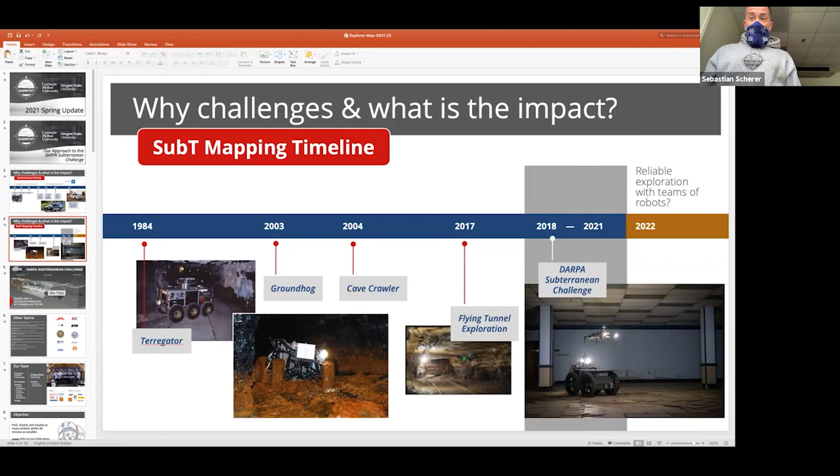Relative to that previous timeline, this shows where we are in the technological development when it comes to underground robots. Starting in the 80s, technology was being developed. We're now currently in a DARPA challenge, and the real question is where do we go from here? Where are the companies, what is going to be industrialized, and really where's the true impact going to be? All right, if we can go to the next slide, please.

All right, so introducing the actual Subterranean Challenge. This started back 3 years ago, and it was 3 circuit events, focusing on 3 different environments. So tunnels was the original competition circuit event.

Then there was an urban event, which happened last year. And then there was supposed to be a third circuit event, which was going to be in caves. That third circuit event was actually canceled due to COVID, what we're dealing with right now.

But as we're moving towards September of this year, the final competition is taking all 3 of these environments and putting them together. The overall goal is to go out and locate artifacts. The robots are acting in a very autonomous way, searching these different terrains and types of environments, trying to locate artifacts. So they have to build a map, there's no a priori knowledge, so they're going out blind and searching these environments.

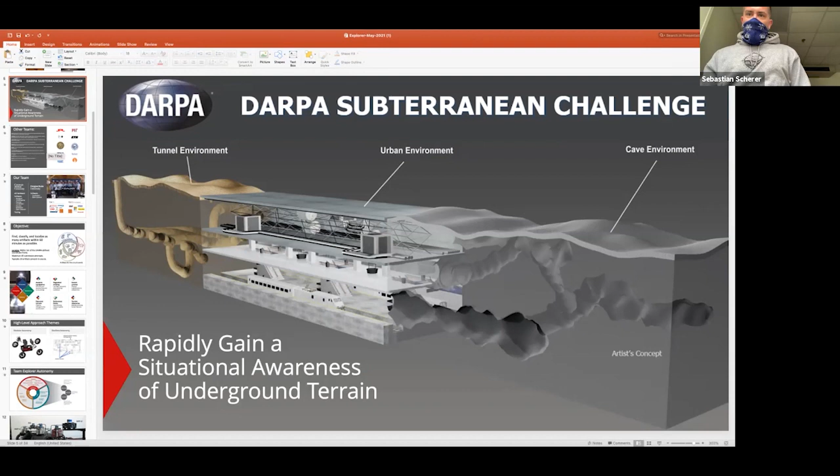That's sort of the overall goal, and in the next slide we're going to introduce what the artifacts look like. But the overall goal is to be able to go and search these environments as fast as you can and locate artifacts with as much accuracy as you can. Cool, thank you Geoff, I'm going to turn things over to you.

Great, thanks Matt. So I'm Geoff Hollinger from Oregon State, I lead the Oregon State part of the team. I wanted to talk just a bit about some of the other teams that are competing in this challenge to give you a sense of how competitive the field is.

So you can see that many of the major players in robotics, in addition to CMU and Oregon State, have teams here. So JPL, MIT, ETH, University of Nevada Reno, Berkeley, Georgia Tech also had a team, UPenn had a team in the first circuit. Here's a list of the various different teams, and they're all taking various different approaches.

Moving on to the next slide, talking about our team, we have two universities. Carnegie Mellon University is the team lead, and Oregon State University is supporting the team as well. CMU is focusing on the hardware, and then portions of the software support, including perception, simultaneous localization and mapping, planning, coordination, the executive level, the base station, and object detection.

Currently, Oregon State University is focusing on coordination and object detection, though in the early circuits, we were also participating in the base station design as well. Oregon State University also helps with testing, and this has been more difficult with COVID because of the remote situation, but previously we had visited CMU a number of times and participated in the testing and helped to ensure that the system was robust and fieldable.

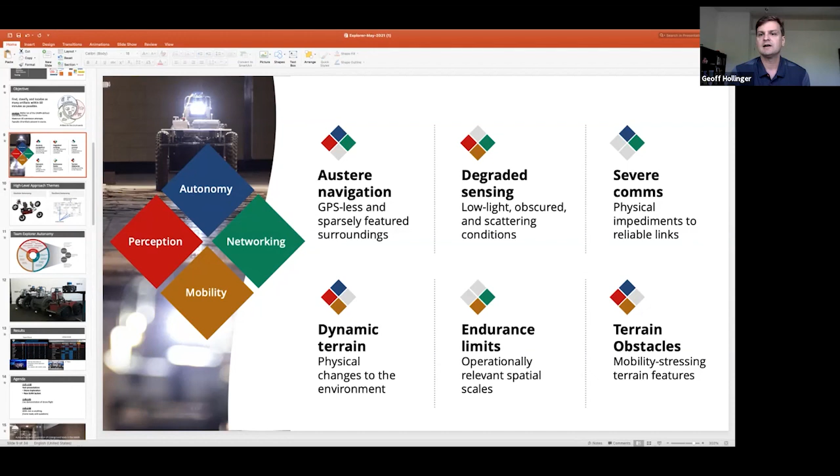This requires us to deal with perception, autonomy, networking, and mobility together in order to solve the challenge. Moving on to the next slide, and I will hand off to Sebastian Scherer, the CMU team lead, to continue.

Thanks, Geoff. So one thing I just wanted to say, I think we didn't say this before, we have a big surprise for you in that we are going to do a live demo of our robots, and that's why we are all wearing masks, and we are in a location that doesn't have very good internet, but hopefully good enough for this talk. So I just wanted to say there's a big surprise and some excitement coming up.

I'll give you a little bit of a high-level idea of where we are trying to get to. The two high-level themes of our approach are: one, this idea of modular autonomy. Can we take both on the software and hardware level these things to be able to rapidly reconfigure the robots and rapidly change them as conditions require? And the second idea is this idea of having resilient autonomy.

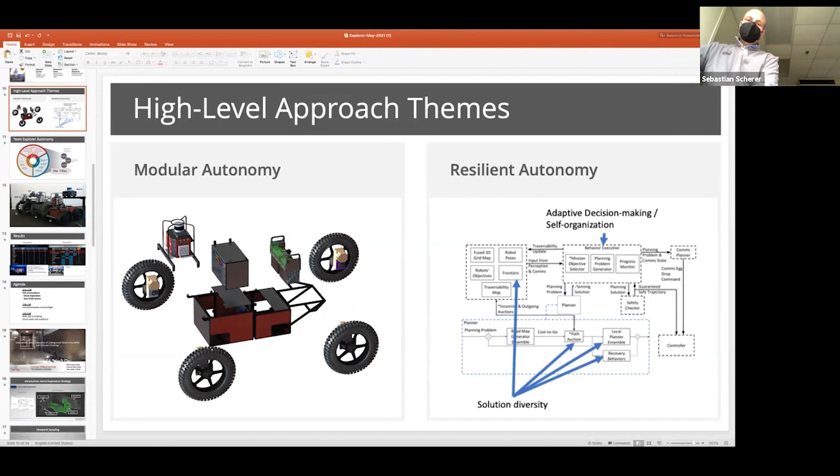The idea there is, can we make the system robust, for example, through having redundancy or having some multiple solution paths. Can we have solution diversity? Can we somehow bring creativity into the system to end up with a resilient system? If you can go to the next slide, please.

And so to build this modular autonomy system, there are many components that we have to build. So the perception system, there's a lot of work in terms of SLAM, sharing maps, object detection, map fusion, and then taking this information, making decisions for exploration, planning, and how we deploy comms nodes. And then this information is used by robots to make decisions about where to go, and the operator also can give us some inputs.

So this is the team of robots that we mainly focus on right now: 3 ground robots plus 4 drones. The drones are on the back of 2 of the ground robots. There's also a more optimized sensor payload that will go onto a walking robot.

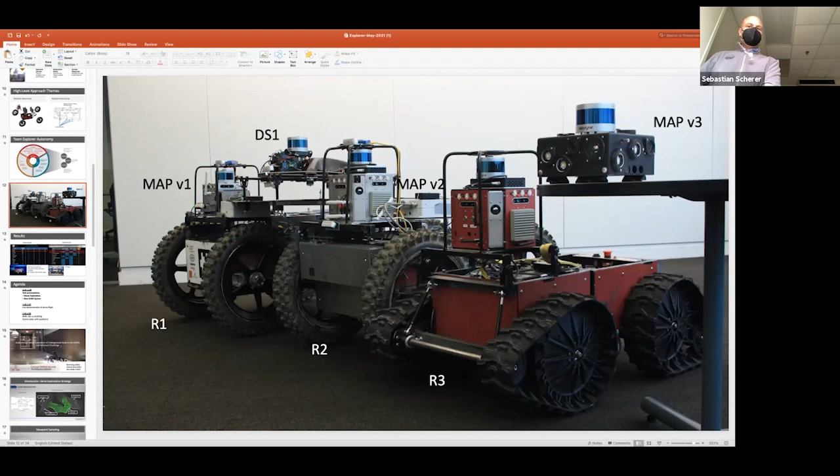So in the 2 prior circuit events, we placed first in the tunnel circuit and then second in the urban circuit, and now getting ready for the final competition.

So to give you a bit of an agenda, our goal is to hand it over to 2 students in the team that will talk more in depth about 2 particular aspects. You saw this big wheel of capabilities, but we just wanted to highlight two technologies that are interesting, and we'll give a little more in-depth presentation on this. And then we'll attempt something novel to us, in the sense that we have never tried this before: a live demonstration of flying our drone on the qualification course. After that, we'll do an Ask Us Anything. So please post some questions in the Q&A as you think about them, and we'll do a big question and answer later on.

Okay, so I'd like to introduce Rohit Garg. He's a master's student in the lab, and he's been working on aerial exploration.

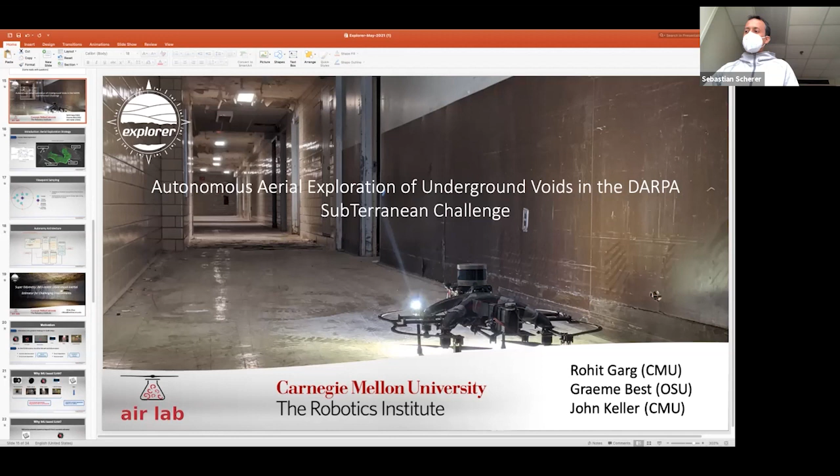Our approach introduces several modifications that improve the overall performance of the classical approach. We leverage a larger map built by the LiDAR to estimate the volume that has not yet been observed by the object detection cameras. This volume can be calculated by subtracting a sensor observed map that tracks volume observed by the cameras from the global LiDAR map that tracks volume observed by the longer range LiDAR sensor. We then place frontiers in this subtracted map, cluster them, and then sample viewpoints pointed towards these clusters. These viewpoints are what the drone eventually plans to.

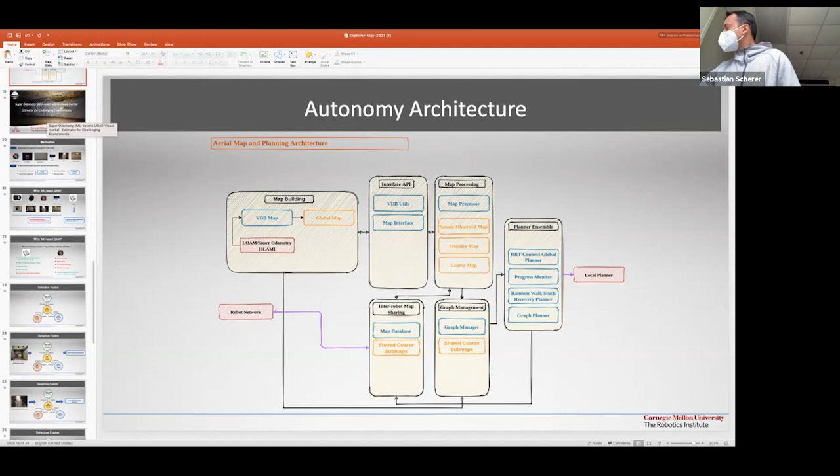Hello everyone, my name is Shibo. I'm a first year PhD student from the Robotics Institute. Today I would like to introduce Super Odometry, an IMU-centric lidar visual inertial estimator for challenging environments. Could you please go to the next slide?

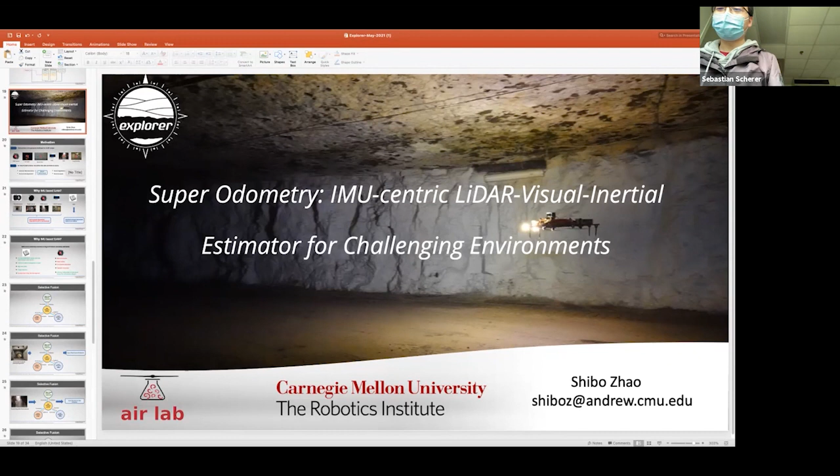Robustness is a great challenge for SLAM today. SLAM still doesn't work well in challenging environments such as low light, motion blur, and geometry-degraded environments such as dust and long corridors.

To solve this problem, we believe that an ideal SLAM solution should be fail-safe and failure-aware. For example, the system should be aware of incorrect data association and hardware failure. Could you please go next?

However, we found that most SLAM systems cannot overcome this challenging environment because the sensor itself is environment-dependent, compared with these sensors. We found that the IMU is not environment dependent, so there is little to no outliers. Could you please go next?

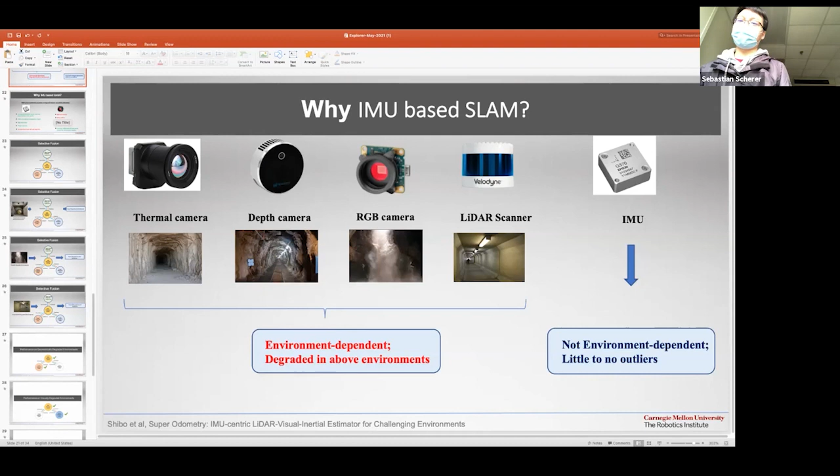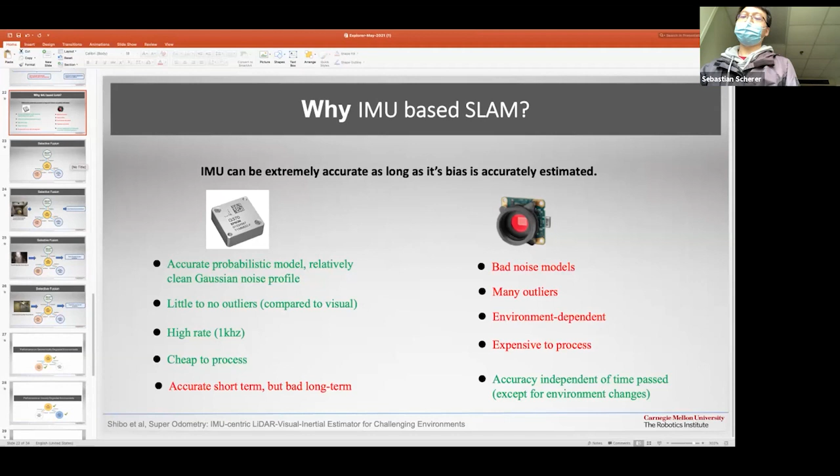Here is a comparison between the IMU and camera. You can see that the only drawback from the IMU is that it cannot achieve accurate estimation over the long term. Because of this, our system follows a key insight: we believe that IMU can be extremely accurate as long as its bias drift can be accurately estimated. So our SLAM system is an IMU-based SLAM system. Could you please go next?

In a normal thermal environment, you can see that because there is no big temperature difference, the thermal camera will be degraded, so we will directly use the laser visual inertial estimator. Could you please go to the next slide?

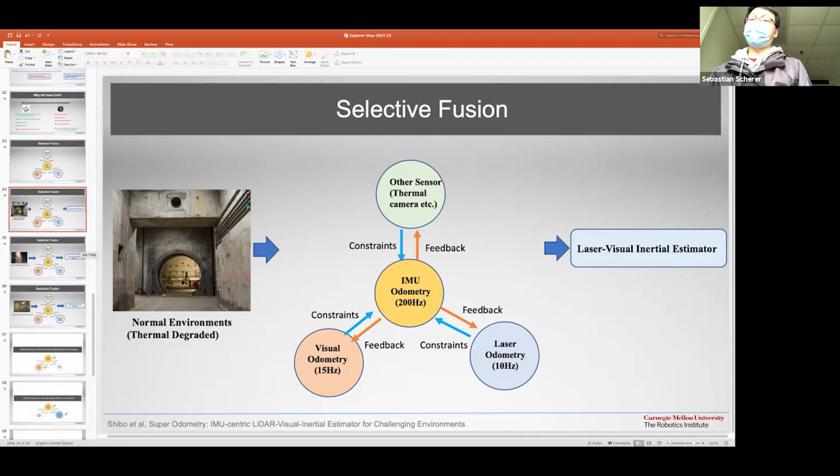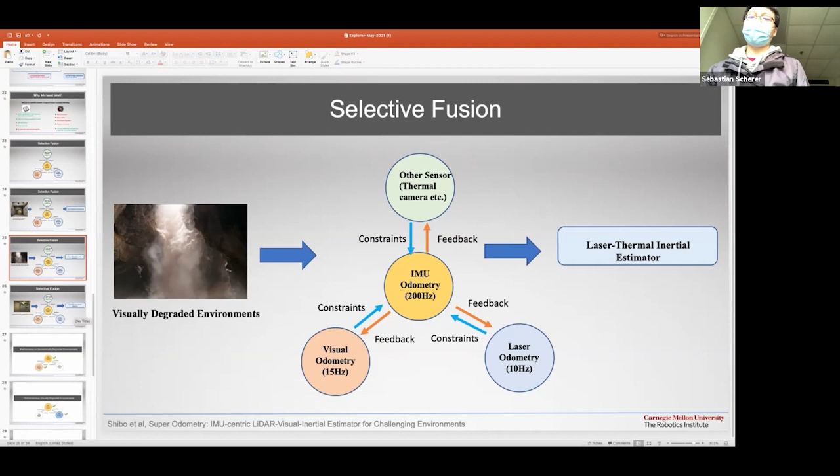In a visually degraded environment, because the visual camera will be degraded, we will directly achieve the laser-thermal-inertial estimator. In the geometry degraded environment, such as a long corridor, we will directly use the visual and thermal together to achieve the visual-thermal-inertial estimator.

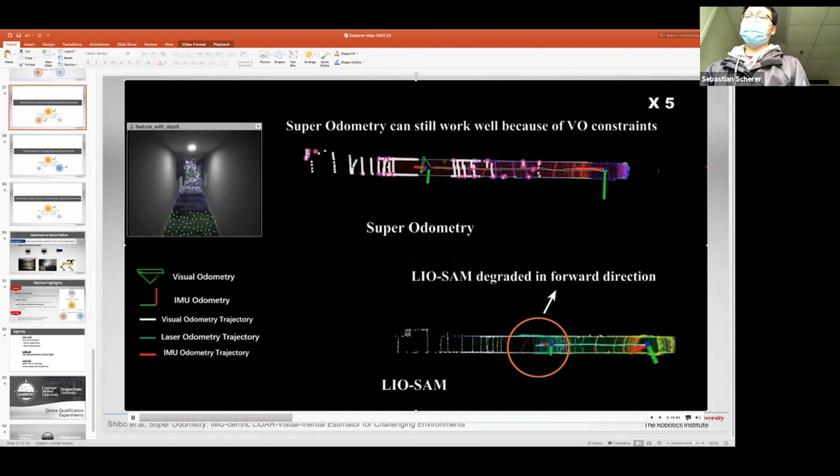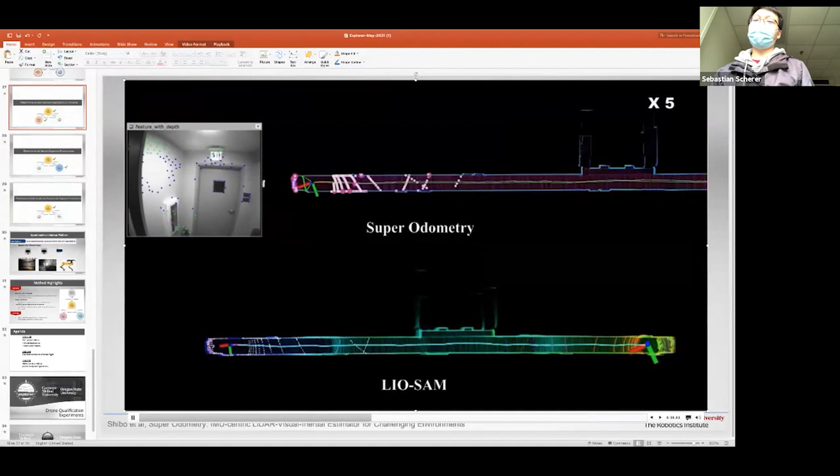Here are the experiment results showing the performance of super odometry in geometry degraded environments, such as a long corridor. We compare super odometry with another famous work, LIO-SAM, and you can see that LIO-SAM began to degrade in such an environment because it lacked constraint in the forward direction. However, super odometry also uses a visual odometry constraint to estimate the forward direction, so it can still work well in such an environment.

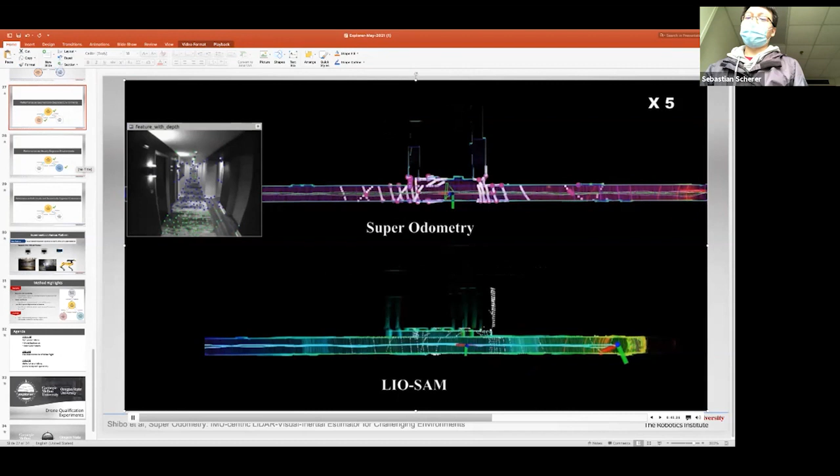You can see that there is a significant drift in the LIO-SAM algorithm. However, compared with LIO-SAM, super odometry can still work well, and the map result looks very good.

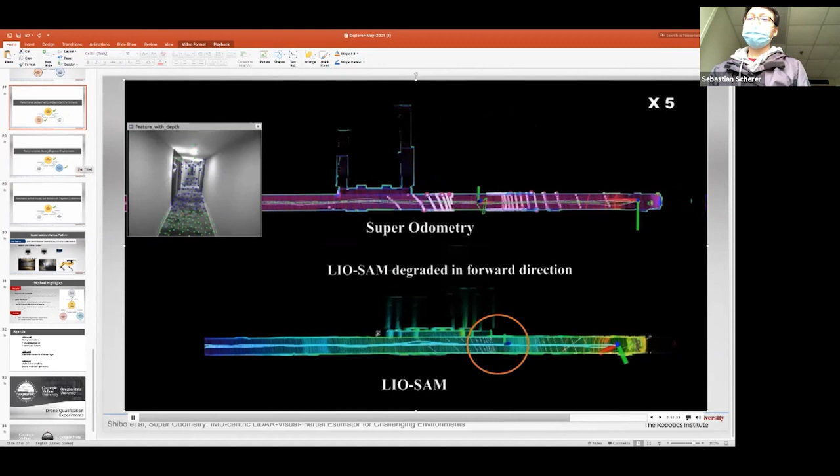We also test super odometry in visually degraded environments. In this environment, we just handheld the sensor with very aggressive motion, and you can see that the image from the visual camera is almost dark, so we cannot get reliable visual features for super odometry. But super odometry can automatically reject the unreliable visual features and make use of the laser constraint to achieve robust state estimation.

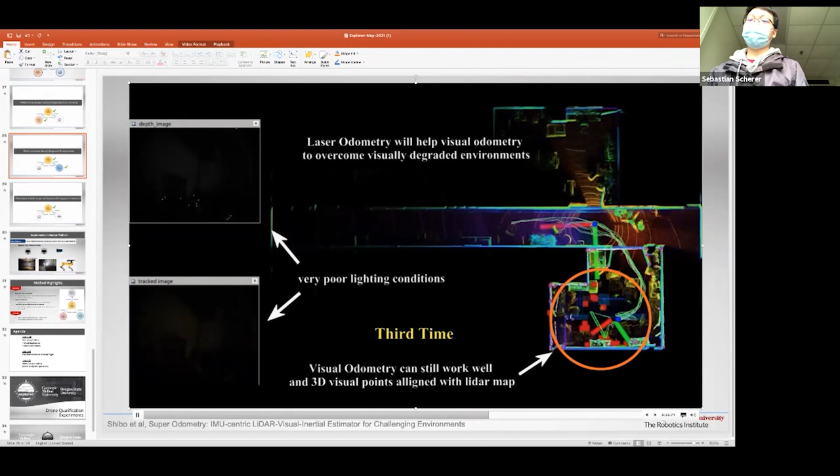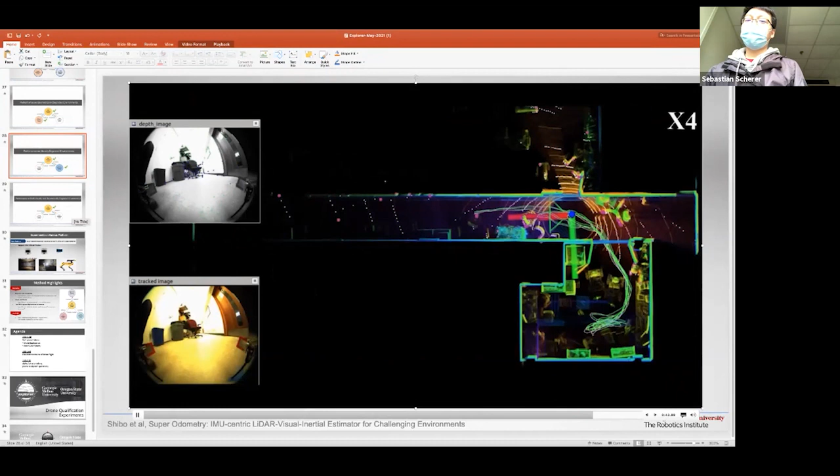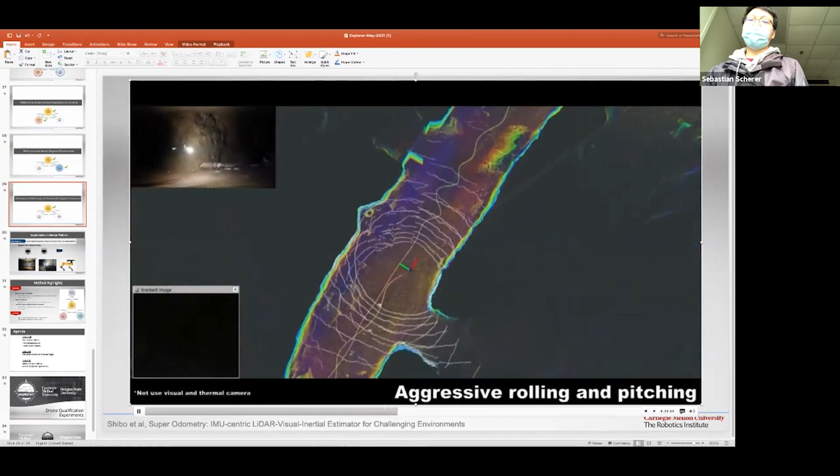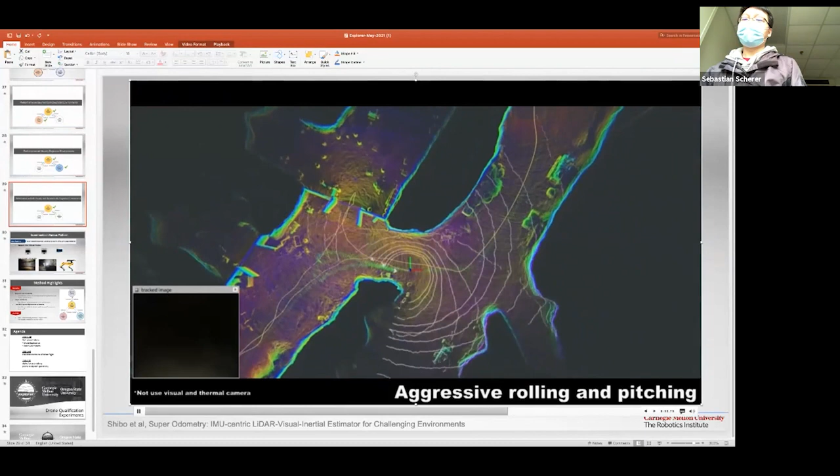We also tested super odometry on both visually and geometry degraded environments, running it with autonomous flight in a cave environment. You can see there is a lot of dust in the environment, and because of this, LOAM and LIO-SAM began to degrade. However, because super odometry can select the most informative measurements and achieve robust estimation, it can still cope with this scenario. The estimated trajectory in this dataset is around 500 meters, a very long trajectory, but we don't find significant drift in the SLAM. The endpoint error is within 5 centimeters.

Currently, super odometry has been fully tested on UGV, UAV, and a leg robot, and it also supports OS1, OS0, and Velodyne.

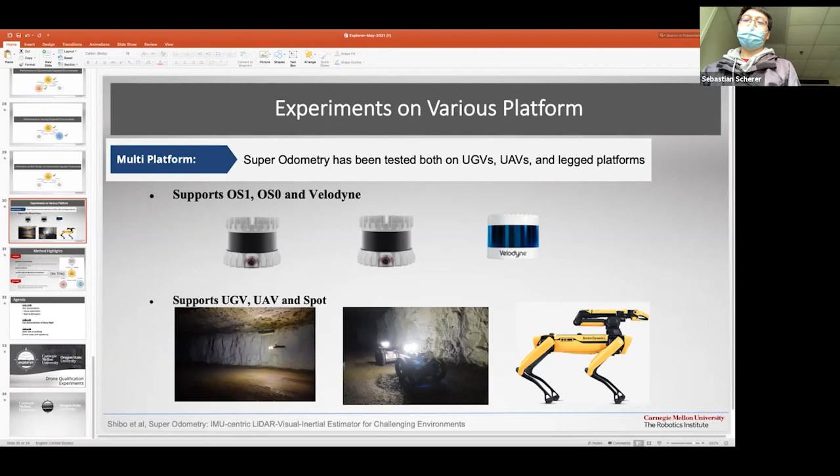Let me summarize the main advantages of super odometry. First, our IMU-centric sensor fusion architecture enables robustness and extendability because it combines the advantages of loosely coupled methods with tightly coupled methods. Second, super odometry is simple but effective because it avoids complex math to fuse multiple sensors. As long as a sensor can provide a relative pose prior to constrain the bias of the IMU, that sensor can be added into super odometry successfully.

Third, super odometry has low CPU usage and can achieve high real-time performance because it doesn't try to solve the big factor graph optimization problem directly. Instead, it divides the big factor graph into several sub-factor graphs and uses IMU pre-integration to solve the problem in a coarse-to-fine manner, which significantly increases real-time performance. One lesson I want to share is that we believe IMU can be extremely accurate as long as the bias drift is constrained by other sensors.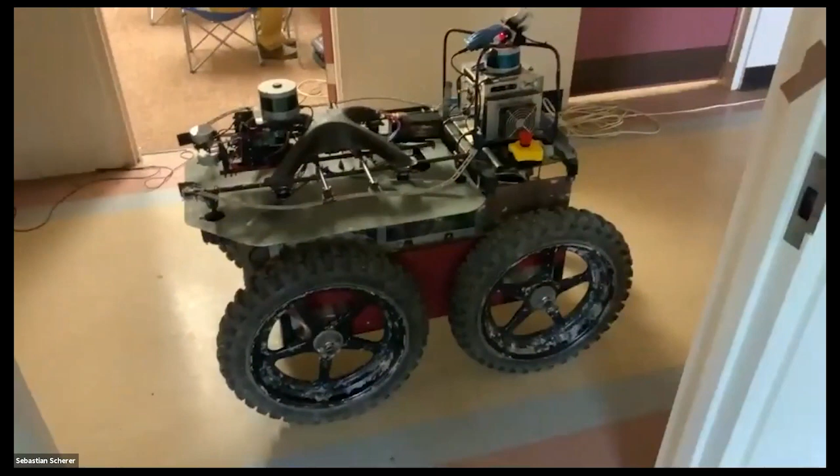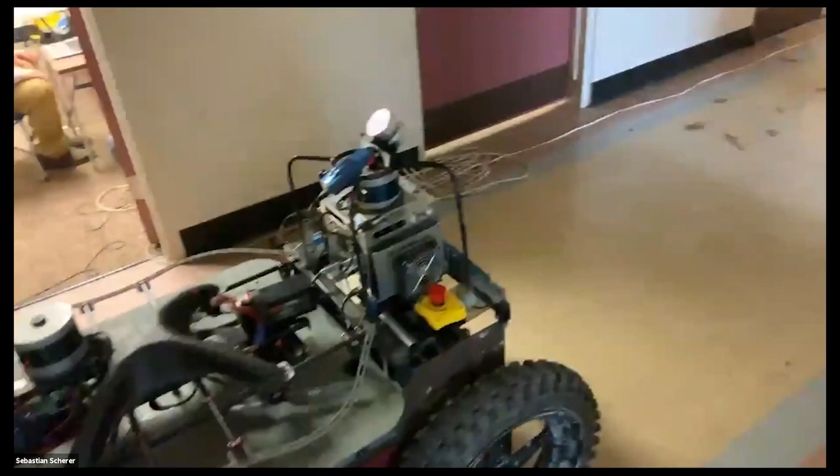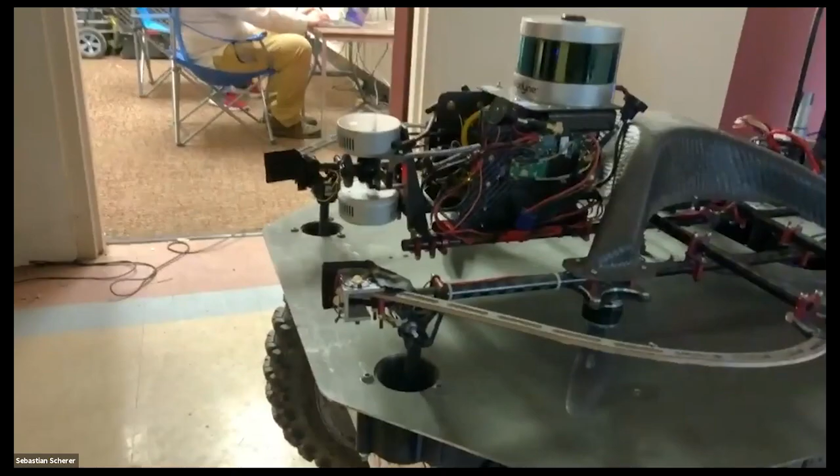Here's our ground robot and the drone, and here we have the base station. We'll start with calibrating the ground robot to our DARPA gate. This dark spot back there is where our start gate is, and I'll walk back there in a bit. We have the drone on the back of the ground robot—see the IMU, and the camera in the front. We'll move the ground robot forward to the start gate now.

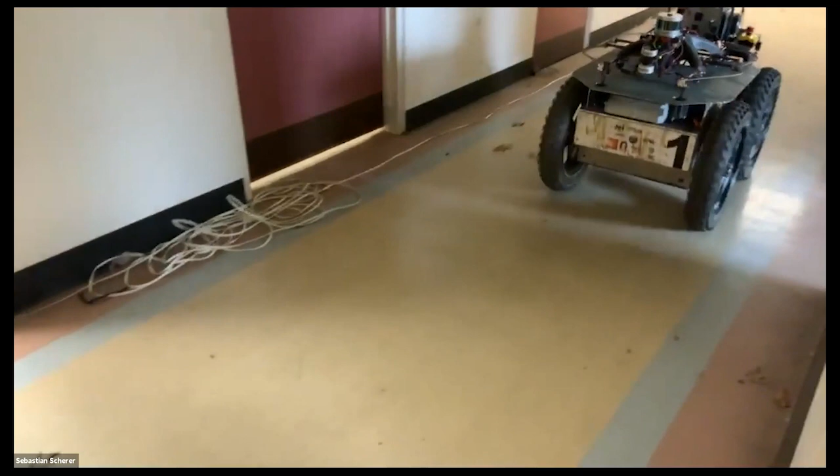.502. Yes. 0.502. Negative 0.046. Yes. Negative 0.046. 0.957. Yes. 0.957.

Yeah, we're currently calibrating the ground robot. Error is 4 centimeters. Calibration is looking good.

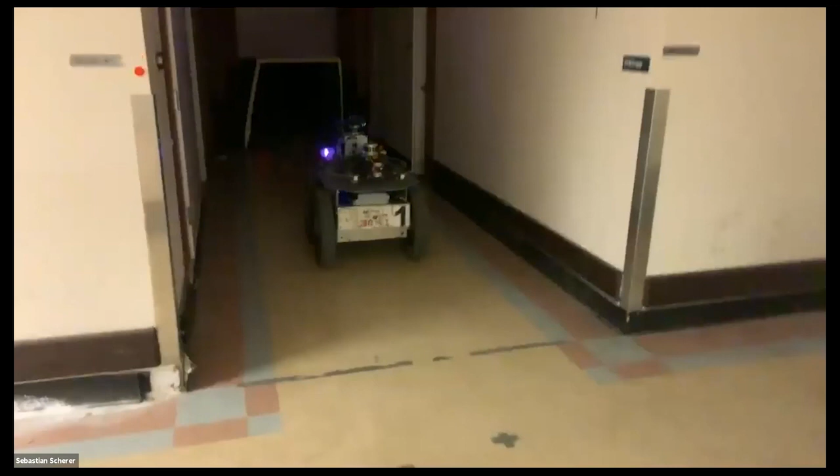Generating T-pose. Okay, so a regular competition robot would be exploring at this point, and then at some point the operator would decide, hey, here's a good spot where I want to launch the drone.

Now we'll start launching the drone. Okay, and now we're launching the drone. So the drone is now being turned on. It's actually turned off when it's on the back of the robot. So the computer is going to boot, and then the drone will unlatch from the ground robot and then take off.

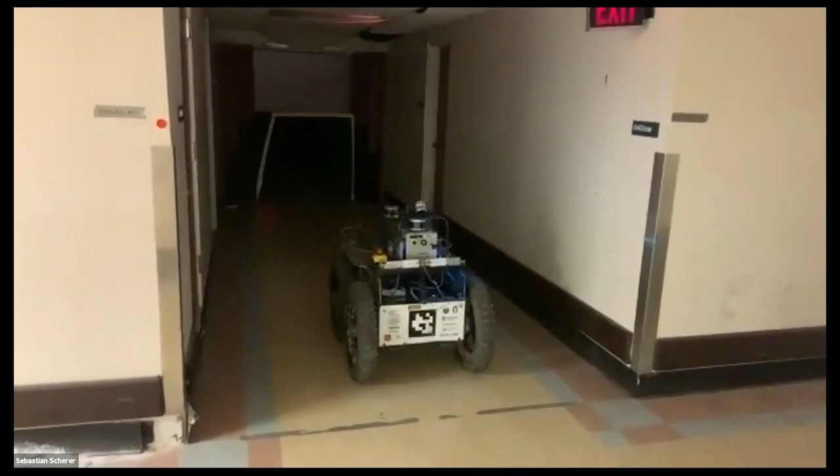John is going to follow the robot, so a safety pilot in full dust mask. It's pretty dusty in here.

So the drone's expected to take off, then it will hover for a little while to estimate biases, and then should fly through the tunnel and start exploring. Then we'll start planning to show you our base station interface, and you can see kind of what the operator would see as the drone is exploring.

So it's just initialized the drone. And when it's ready to take off, it will turn on the lights and then start taking off.

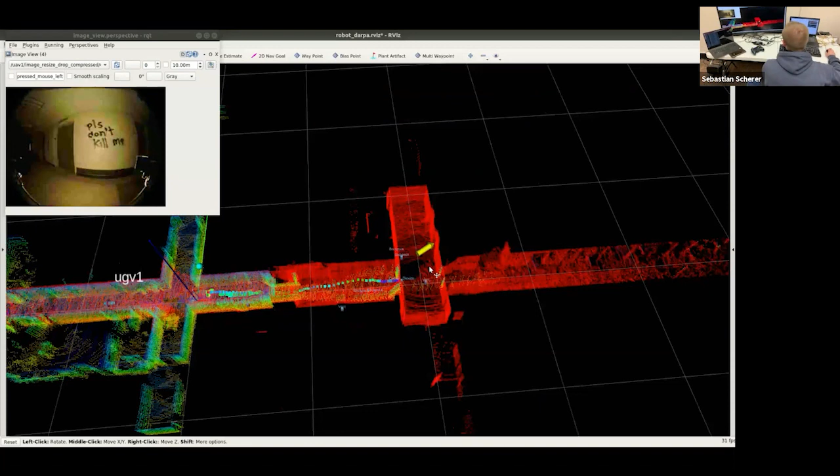Okay, yeah, I had muted the sound a bit because it was noisy. So yeah, the drone's exploring right now. We have this narrow passage in the beginning to give it a bit of a challenge.

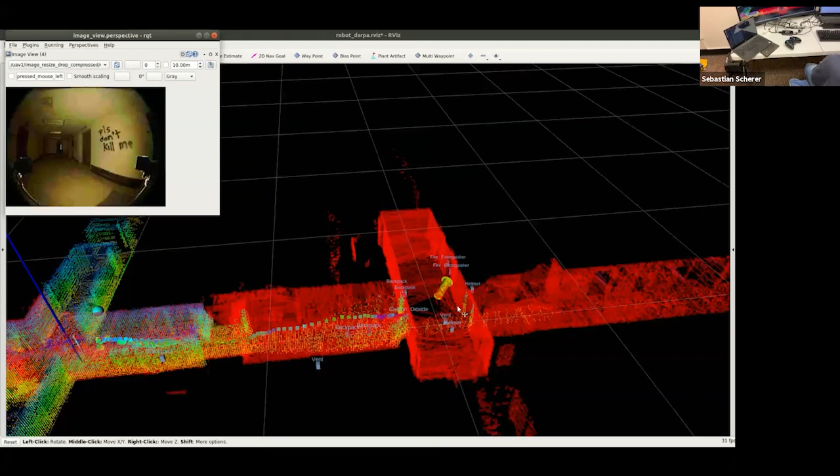And of course, there's a demo effect. This is the first time it has hung out in front of the tunnel so long. But that's why it's fun, right? Do this in real time.

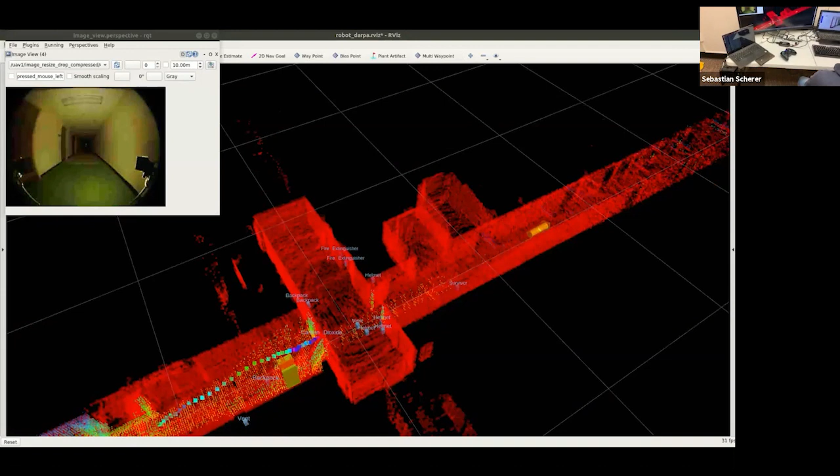So this is, you can kind of see what the operator is seeing on the base station. We do send a kind of low-res camera stream just to give a little more awareness to the operator. And then the main interface is really the 3D map for the operator to have an idea.

So it was going down a hallway here. Now it's decided to enter what we call the gas room. So ideally, it should be able to detect some gas in here.

And then here it also is just flying in front of a backpack. And then you can see that the carbon dioxide measurement is already going up here around the yellow arrow.

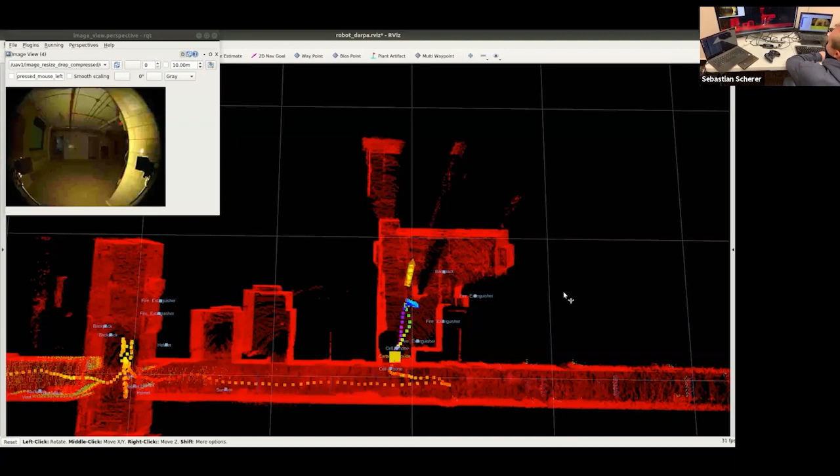So there are a couple of artifacts in this room. There's a cell phone, I think, also in this room, right here. Yeah, there's a cell phone and a backpack. And then actually the gas is where the cursor is moving right now.

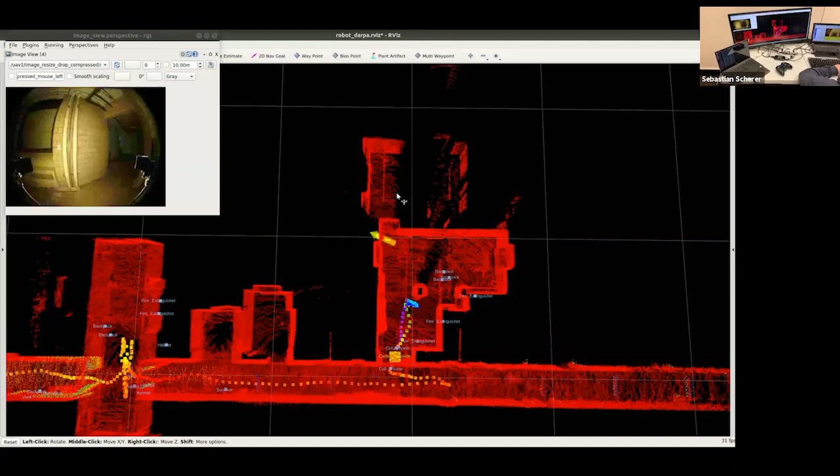Actually, it's just entering the room where the gas artifact is. It's to the right. It's a gas bottle, a CO2 bottle.

Yes, and you can see the highest value right now is in the gas room, and it actually put it in the middle of the room, the artifact. We actually report at the door, but it puts it where it thinks the highest value is.

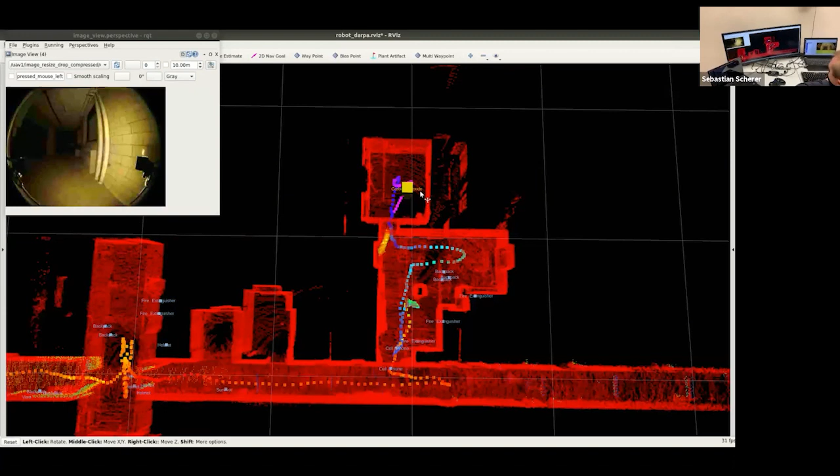So now it is done exploring, and so it should continue further down the hallway to see if there are other artifacts down there.

So here's another room. That room is a little harder to enter. It has a barrier that blocks roughly half the door. And so it just flew over the barrier.

So it's looking in that room. There are a couple of artifacts in that room as well. There's a rope and a drill, and I guess another cell phone. There's another cell phone in there as well, right here.

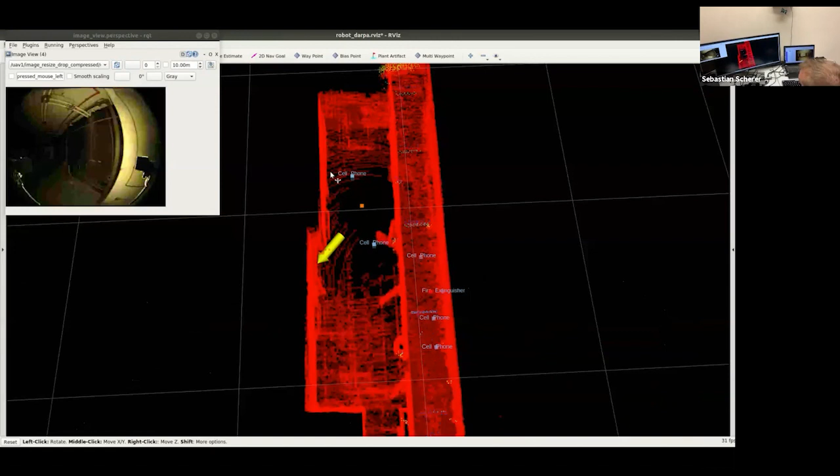And a helmet. There are actually two, and here you can kind of see the drill in the picture. There's detected a drill as well. So it's actually exiting through the door.

And it looks like it's deciding to explore some of the other rooms it has skipped.

So there was a question about what the ground vehicle was doing while the drone was exploring. Basti, maybe you want to comment on that. Yes, so here we are essentially testing only the drone. In a real situation, the drone would be launched inside the course, maybe a couple hundred meters or however far inside the course. And once the drone takes off, the ground robot starts exploring on its own. So here we're basically not testing the ground robot, but nominally the ground robots would be exploring.

And here we just flew past the survivor.

At some point the drone's gonna come back home. I don't know if that's already happened. Yeah, I think it's gonna explore that section it skipped when it flew out. And here's another backpack.

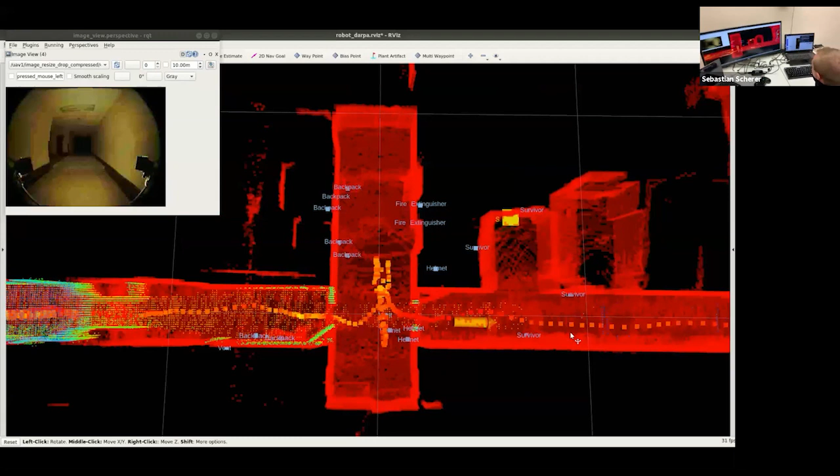Looks like maybe now it decided, okay, I'm out of battery, and it's coming back home.

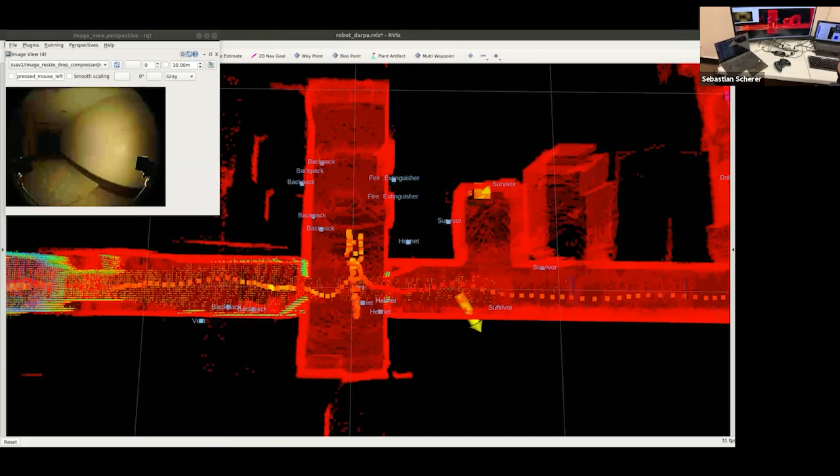So it decided there was some problem in terms of the flight time estimate. Is it trying to do an emergency landing or not yet? It's still landing at home. Ryan, what is it doing? Yeah, landing at home, it's trying to land at home. Okay, I had a quick rewind. Oh okay, it quickly thought it could make it through the door.

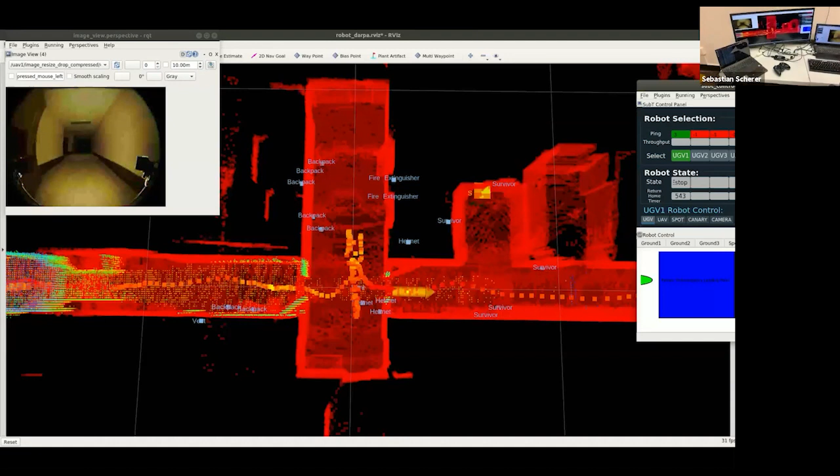So the operator knows what the robot is thinking by looking at what's called a behavior tree. It's essentially a slightly different way of doing a state machine, and we send that for every robot. The tree is pretty big, but you know which states the robot goes through.

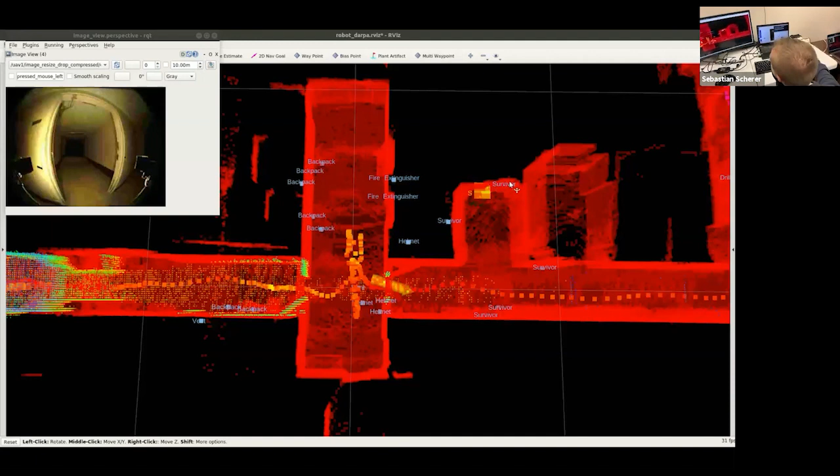So what happened now is that it had trouble getting through the door, so it ran out of time to go home, and it keeps track of the best place to land in case of an emergency, and decided to land there instead.

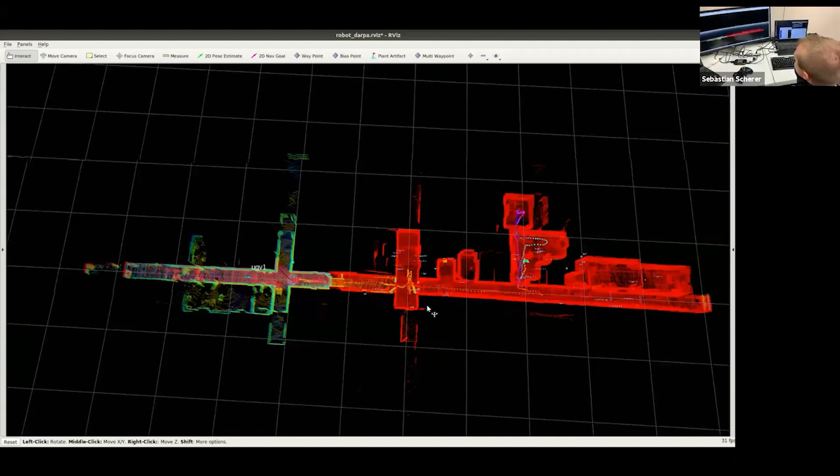So I guess now you can kind of see what the map looks like that it built. The colored map is what the ground robot built, the red map is what the drone built, and then you can see the artifacts that are highlighted. And then this kind of streak of colored points are the gas measurements that are above the threshold.

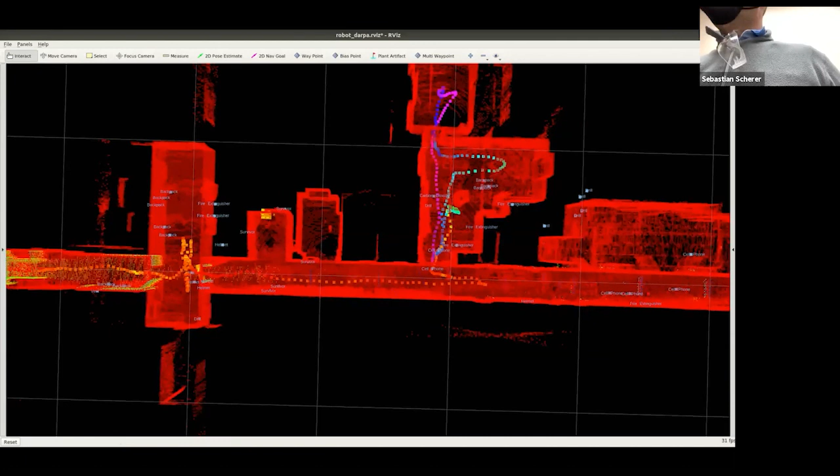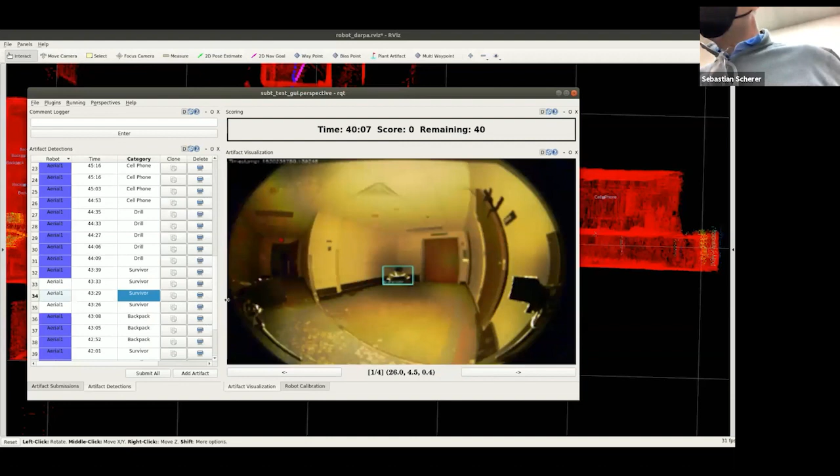So next we'll show you some artifacts that it detected. So here's an example, a survivor that it detected, and we can also show that to you in the 3D map. So it's up in the corner where Ryan's moving the mouse, and then when we're happy with it, we can submit that artifact, and we got a point.

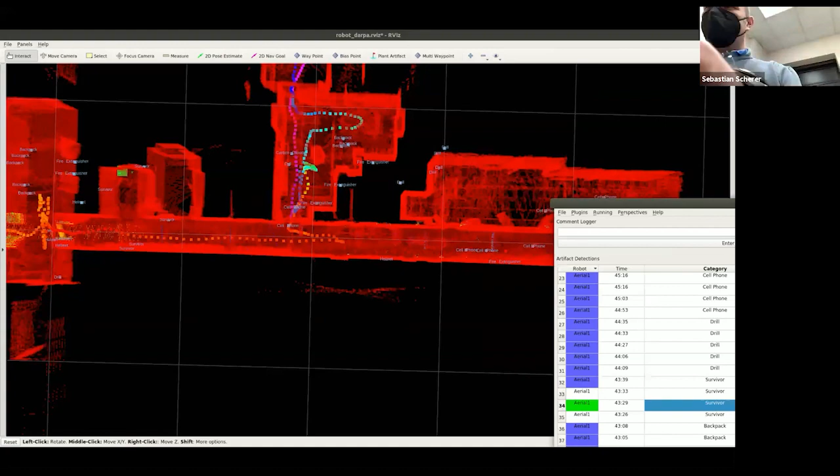So that's how it should work in the competition if everything goes well. Thanks everybody, and I think now next we're going to the ask me or ask us anything phase.

So I think, let's see. In terms of, so there was a video, but I think maybe it's better to ask some questions.

How much computer vision research goes into creating these robots? A lot. We are not using a T265. It has an L515 depth camera that we're using for seeing up and down on the drone.

The cell phones are detected using the Wi-Fi, just scanning for Wi-Fi. We have some visual detection, but it doesn't work too well because they're so small and the appearance changes a lot.

So it's being, or on the cell phone is being taken, the processing is definitely being done on the drone. There's a constant trying to optimize the size, the weight, and the power is a constant issue to have everything running. It's all running on a single computer, so to have the entire stack running simultaneously is just, yes, that is a full-time job. That is several people's full-time job trying to figure that out.